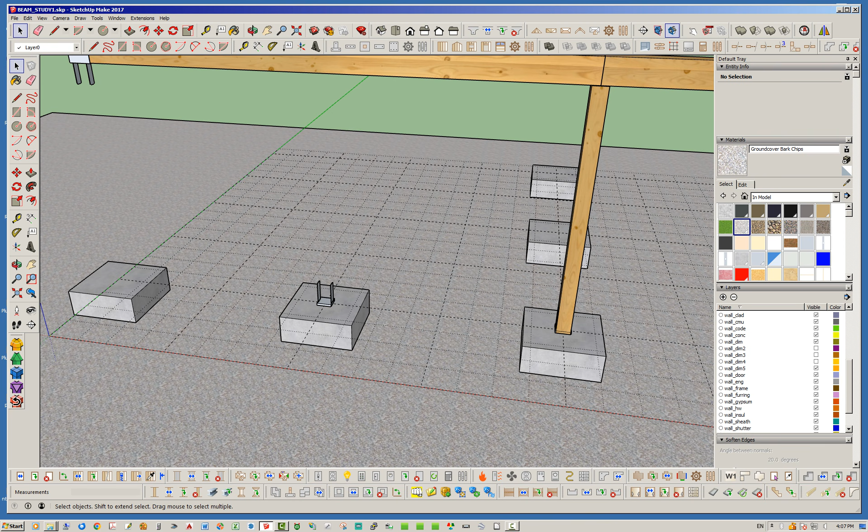Wilkerson, and today I wanted to talk about a recent update I've made to the post module of the wall plugin. So previously, as you guys may know, we had beams and footings, spread footings particularly, that have hardware associated with them. And of course, when you create these, let's go ahead and edit this

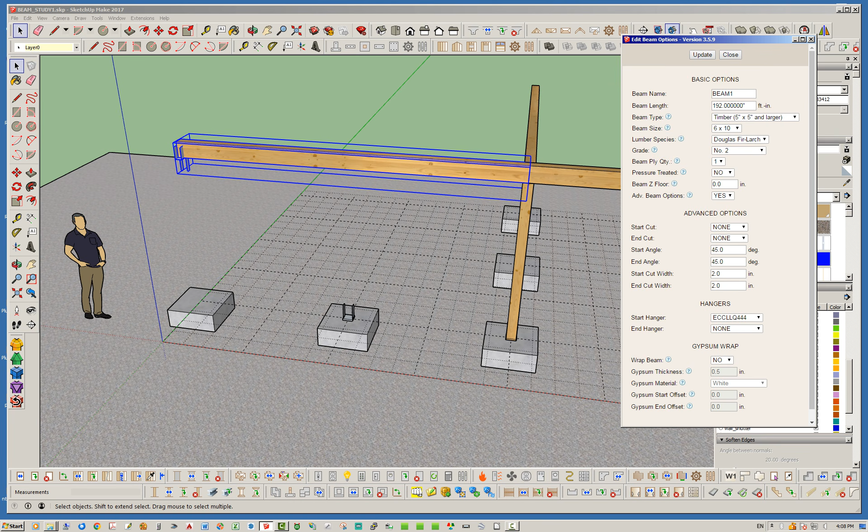column footing. You can add in all these different Simpson Strong-Tie bases with the footings, and with the beams you can do a similar thing, but you have the option for different hangers, of course, and you also have the option for a number of different types of post caps, I guess is the right word for it. And as you can see, there's quite a few variations on that. But yeah, obviously that's the wrong one.

But so the problem is when I initially set this up, I thought, okay, well that should be sufficient. We've got hardware for the bases with the footings, and we've got hardware for the caps with the beams. However, after a little bit of playing around with this module and trying different configurations, like something similar to what I've shown here, I quickly realized

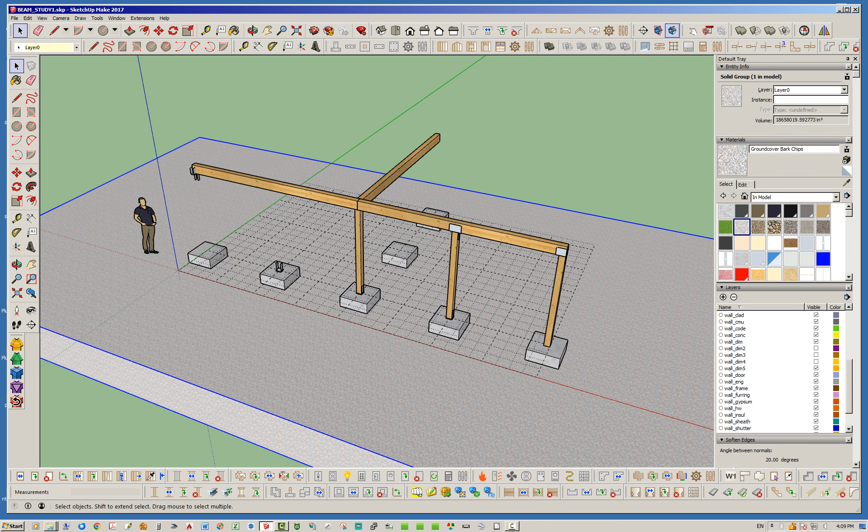that with multi-span beams, we don't have a solution that will have the proper post cap, because the caps or the hangers or the hardware essentially can only be assigned at the end of each beam. So multi-span beams were not completely covered. So that prompted me, of course, to add hardware now to the post module.

So let's go ahead and edit this here in post and jump in there real quick, and we can show you what we've got going on. So basically, we've got a little redundancy now in the system, right? You can assign a base and a cap to the post, independently, of course, and you can rotate them and offset them and all that good stuff.

So there is a little bit of redundancy, because you could potentially, for instance, with the base, have it set up here with the footing, like I've shown here, or you could have it set up here with the post, which I've shown here. See, if I delete this footing or hide it, you can see that hardware is actually associated with this post assembly, not with this footing assembly.

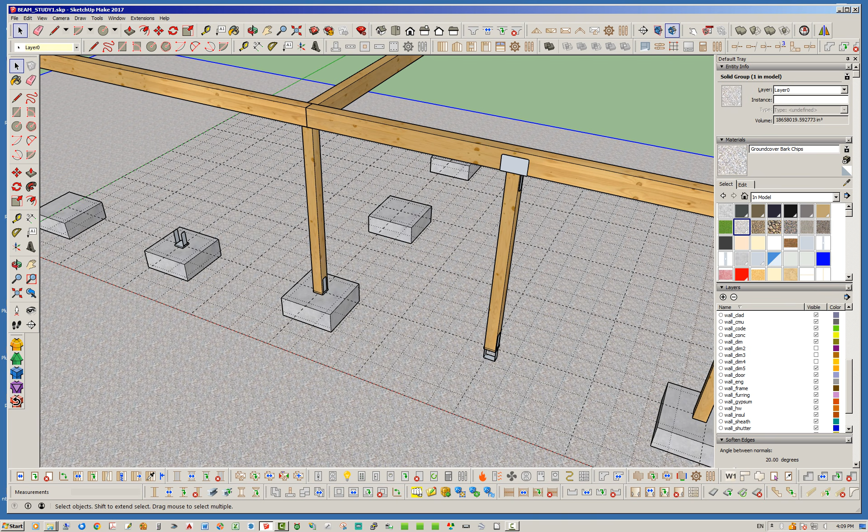So I guess you've got overlap, but it's really not overlap. You can basically utilize it however you see fit. So it gives you that flexibility, I guess. So it's probably not a bad thing. All right, so yeah, let's take a look at a couple of situations here.

So for instance, here on this post here, where we've got three beams meeting at an intersection like this, you can basically set up any one of these beams with the appropriate post cap here. But I think in this situation, actually, it's easier just to do it here with the post. So let's go ahead and try that out.

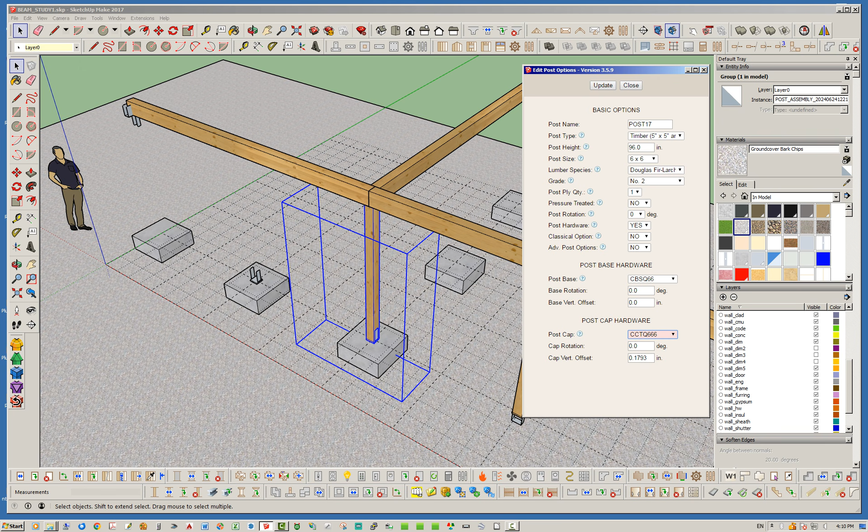So I'm going to go ahead, I think the right one, actually it's not the base hardware. I want to go ahead and turn on, it's been a while since I looked at this. Okay, so it's the T version, right? Okay, so now you'll notice that, of course, that's rotated the wrong way. So easily we can just jump in here and click 180, and it will flip that around for us.

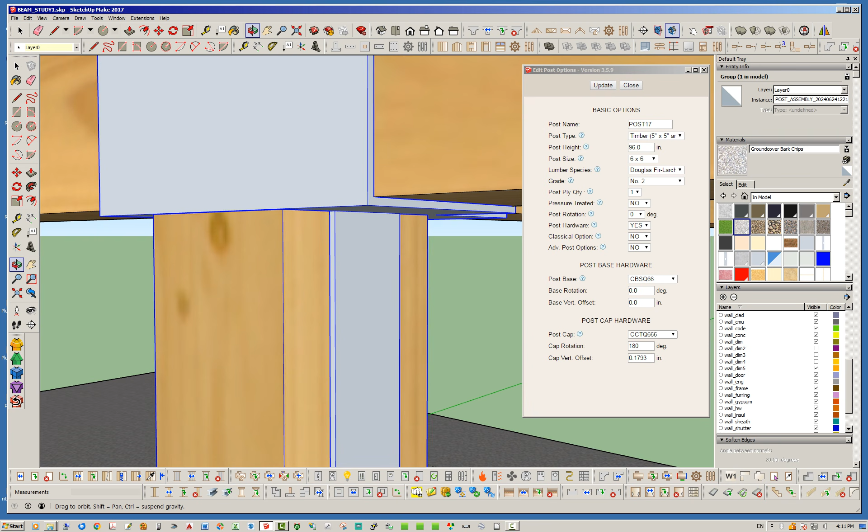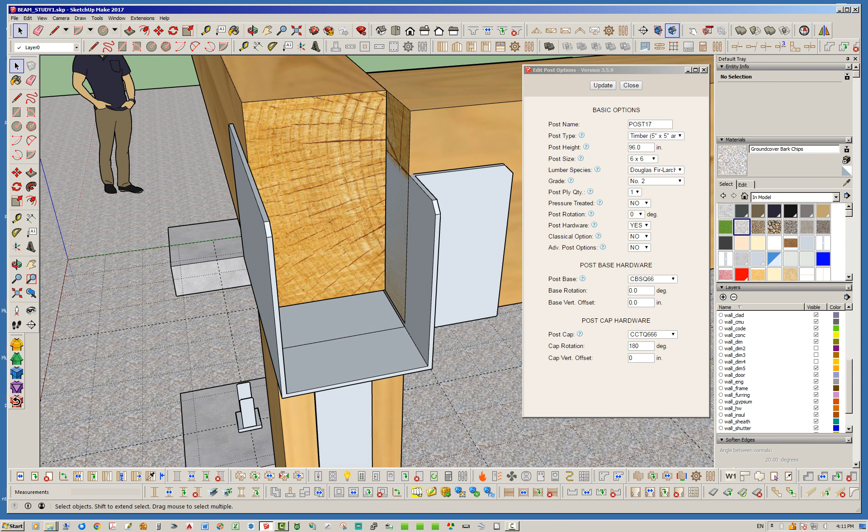You'll notice too that I also have a vertical offset input right there. Now, the reason for that is because when you first set up or use the default 0, you're going to notice that these post caps actually, I'm going to hide this beam real quick so you can see that better. The post cap actually lands on the top of this surface, is flush to the post itself.

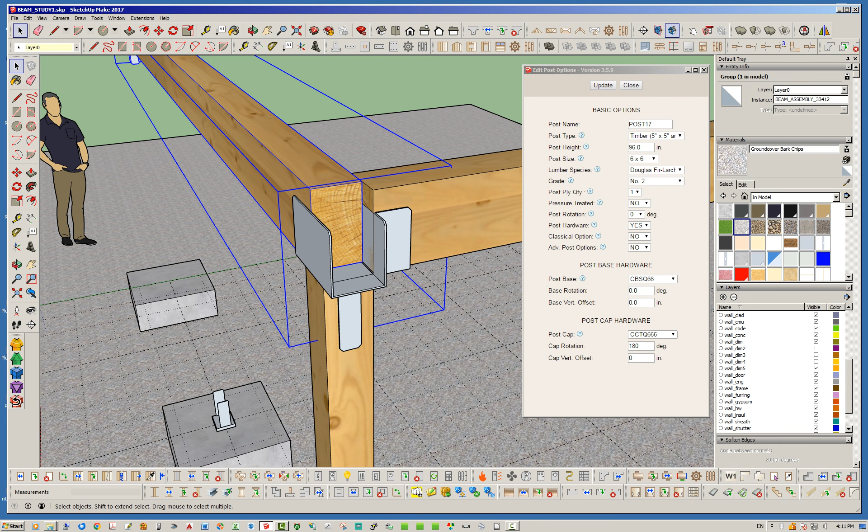And that's actually by design, because in most instances, you might want this to be the nominal height. Let's say this post is 96 inches. You want this beam to be sitting right on that post, and therefore it's at 96 inches in height, for your model's sake. Now, in reality, of course, you're going to have about an eighth of an inch here, I think it is. It's 0.1793 to be exact.

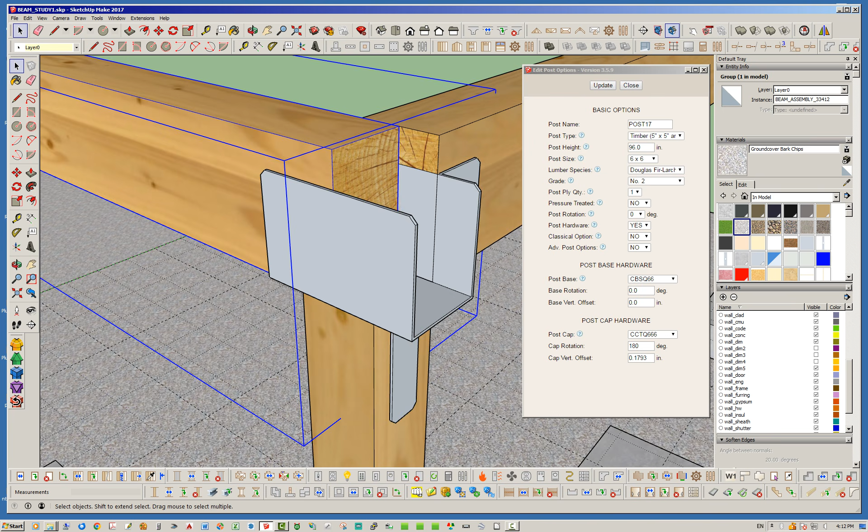But you're going to have a little bit of clearance, right? Because you've got to have room for the hardware to get in there. So, if you really want to be exact, which I actually do, you can go ahead and input that in, and you can actually raise your cap here a little bit, and it'll be precisely where you need it to be. So the point is, these little offset parameters give you that flexibility to be as granular or as exact as you want to be.

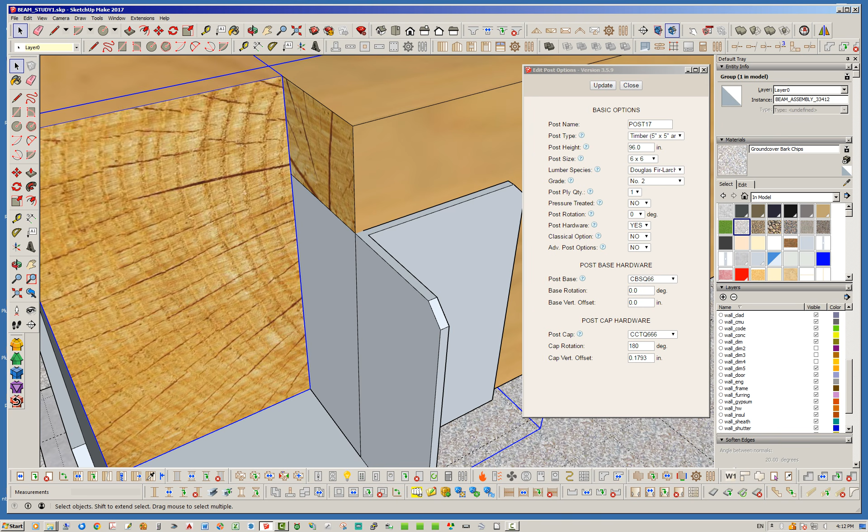Same sort of thing here. You can see where that beam comes into that cap, and you want to actually route that out of there, and that'll fit nice and tight. Or this beam might just go ahead a little bit, and that's where it lands. So it just depends how you want to model this.

But the bottom line is now with the post module, we've got hardware associated with it, both the post base and the post cap. So now you have that flexibility to do whatever you need to do. And again, you can rotate the hardware top and bottom independently, as well as vertically offset them. Same sort of thing here on the bottom I wanted to point out.

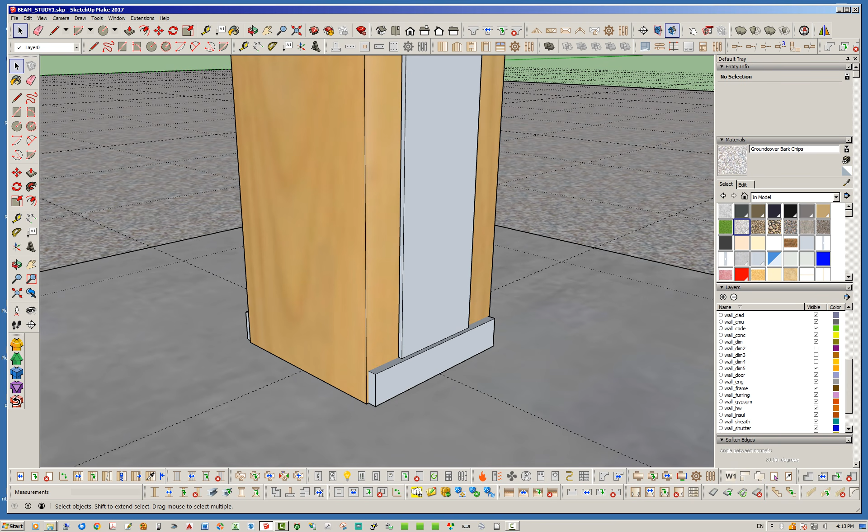So when you first draw this post, by default it's going to put the bottom of the post right at 0, 0, 0, right? And it's going to be at the 0 level. But you've got a 1-inch standoff here. And so you've got a couple options how you can handle this. You can leave it like that and just figure, here's our nominal. We want the model to be nominal heights, and then we'll sort out the details when we actually fabricate it.

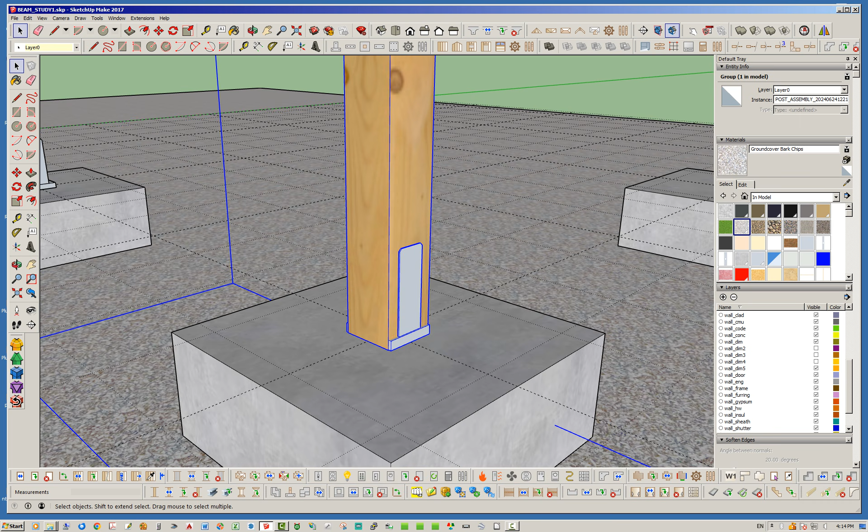Or if you want to be exact, in a situation like this, now I think this one's modeled with the post. So if you actually want to have it lifted off, then you would probably want to edit this post and make it 95 inches in height. Okay. And then what you can do at the base is you can actually vertically offset it negative.

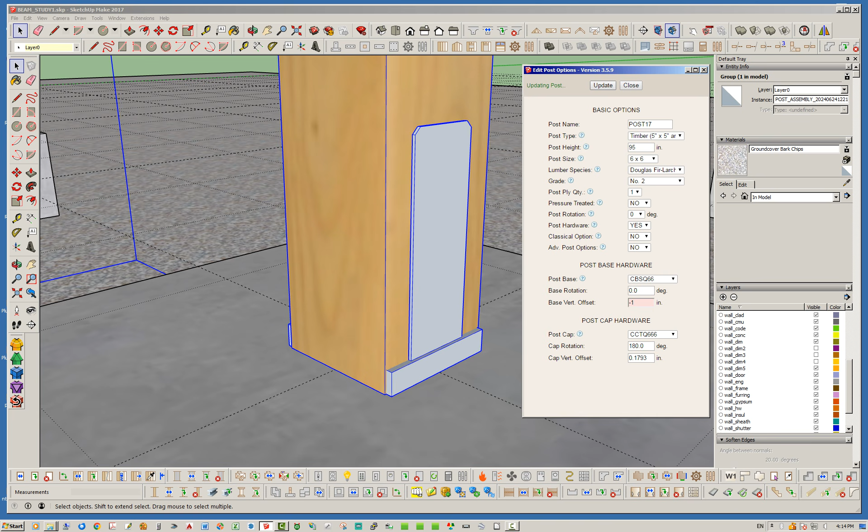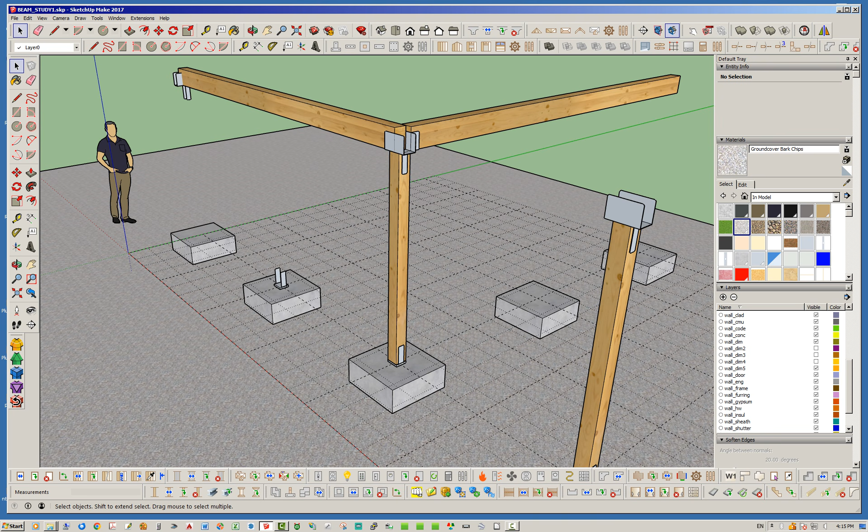So now we're going to take this whole assembly, and as it is now, it's an inch too short. Now all we have to do is raise it up 1 inch. We can just move it with the SketchUp native tools, right? We don't have to do any fancy plug-in stuff here. Okay, so now the post itself just got 1 inch shorter, and then we offset the base down 1 inch, and so it all lands perfectly on top of that footing again.

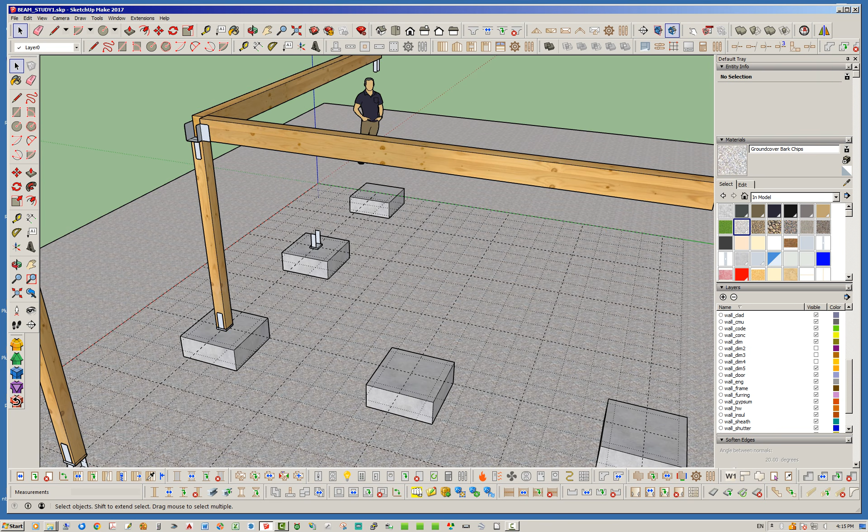So yeah, there's a lot of little adjustments you can make to get everything to line up the way you want or not. But with this hardware now associated with the post module, I think it really gives you the flexibility you need to model up just about any post and beam system that you can think of. So I hope this is helpful. Hopefully we haven't overcomplicated this too much. I don't think I have, but feedback from you guys will let me know.